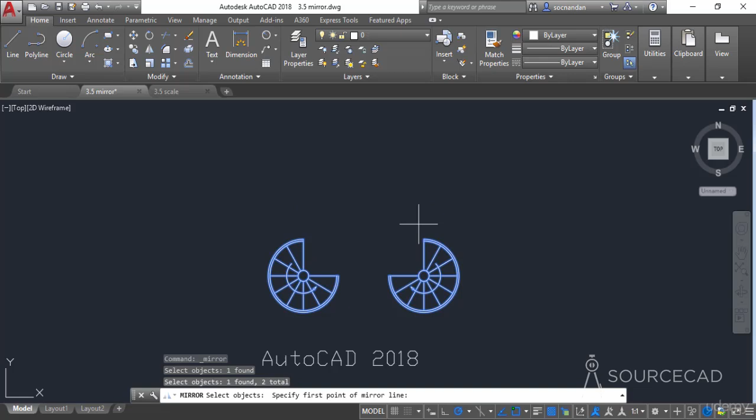Now let's say we want to make a mirror image of both of these objects on the upward side. For that, I'll once again select the mirror tool, select both of these objects, press enter, and specify this as the first mirroring point and this one as the second mirroring point, then simply press enter. Here we have it, the geometry as per our requirement.

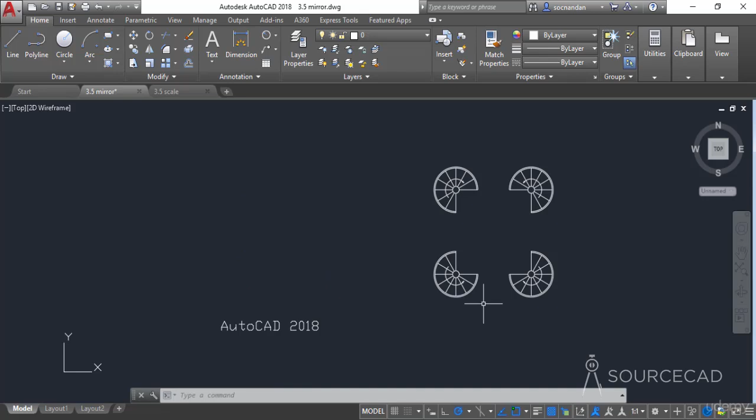Now in case you want to make a complete mirror image of all four geometries somewhere over here, you can again select the mirror tool, select the complete set of objects, press enter. Again you need to specify the mirroring line: select this as the first mirroring point and this point as the second. Now let's erase the source object in this case, so I'll click Yes, and the source object is deleted and a copy of that object is made here. Now let's press Ctrl+Z a couple of times to return back to the original geometry.

Now we'll try the mirror tool on this text also. Select the mirror tool, select the text, press enter. Click at a point, then click at the second point, and press enter. But in this case, you'll notice that the mirror copy has not been made. It is simply a copy of the original object, and these two objects are not laterally inverted as it was in case of the other object.

So in order to make a mirror image of text, you need to ensure that the mirror text system variable is set to 1. I'll make a copy of this object here, and now I'll apply the mirror tool once again on this text. But before that, I'll change the system variable. Let's type mirrtext and change its value to 1 and press enter.

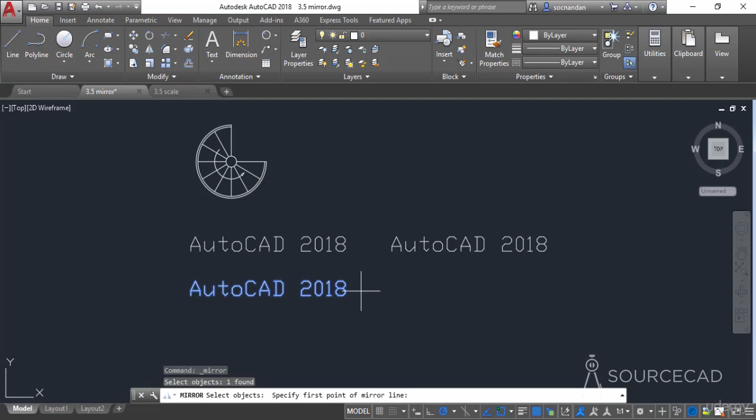Now select the mirror tool, select the text, press enter, specify the first point and the second point, and press enter. Now we have it as a mirror image, and you can compare it with the original copy, the mirror image which we made without using the mirror text system variable. In that case, the mirror text system variable was set to 0. In this case, it was set to 1.

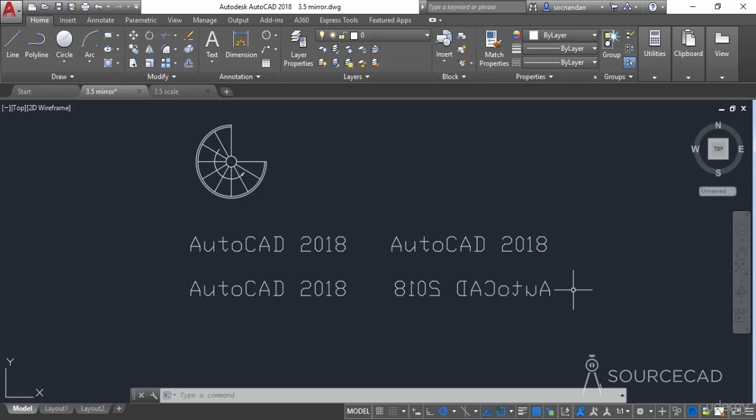So I'll once again type mirrtext and change its value back to the default 0. Now let's look at the scale tool. Here we have a simple geometry, and now let's assume that we want to increase the size of this geometry.

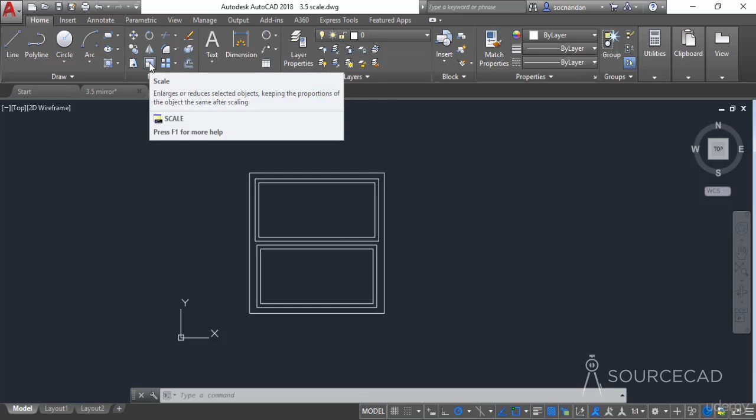So in order to increase the size, you can use the scale tool. Simply select the scale tool here on the modify panel, select the object, press enter, and now look at the command line. It now prompts you to specify the base point.

The base point will be the point which remains fixed when the object is elongated or contracted. So when the size of this object changes, the base point will remain fixed. I'll select this lower left corner as the base point, and now you'll notice that the size of the object changes along with our cursor.

So you can either dynamically apply the size using the cursor, or you can also enter a scale factor. In order to increase the size, simply add a value which is greater than 1.

If you add a value of 1.5, the size will increase to 1.5 times the original value. If you type a scale factor of 2, it will make a geometry twice the size of the original object. If you type 3, it will make a geometry thrice the size, and so on. Similarly, if you type 0.5 as a scale factor, it will decrease the size to half of its original value, and so on. So I'll type 1.2 in this case and press enter.

And here we have it. The larger geometry has been made. So now let's press Ctrl Z to get back to the original geometry.

Now, in case you want to make a copy of this object after scaling, you need to select that corresponding option. So I'll select the scale tool again, select the object, press enter, specify the base point, and now here we have an option of copy. Let's select this copy option, and now let's reduce its size to half of its original value. I'll type 0.5, press enter, and now you'll notice that we have a copied image.

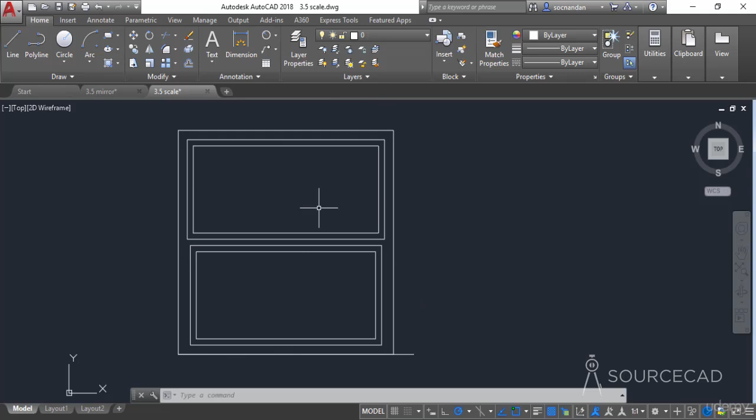So now you can see that there is a slight gap between this endpoint and this line. Let's assume we want to scale this drawing so that the base length becomes 1000 units and all the remaining length stretches in the similar proportion. For that, we can use the scale reference option.

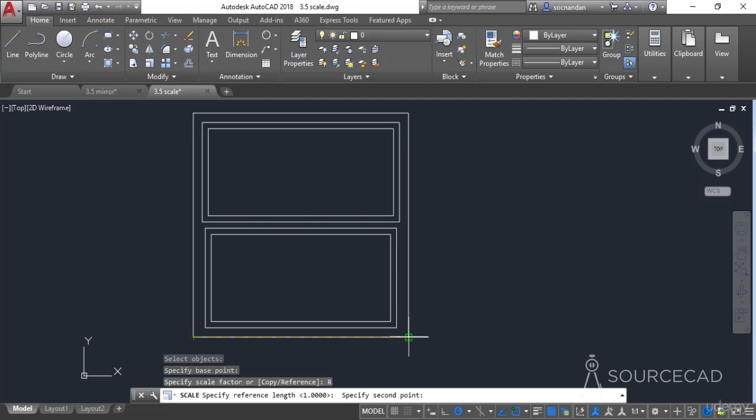So once again, go to the scale tool, select the object, and press enter. Now specify the base point, which we have specified in the previous case also, and from the command line select this reference option. Now we need to specify the reference length, which is the length of this line from this point to this point. I'll simply click at this point, and now I'll click at this point. So that's the reference length.

Now you need to specify the new length, and the new length is 1000 units. Simply stretch it and click at the end of this 1000 unit length line. So click here, and here we have it. Now the base length is equal to 1000 units and the remaining lengths are proportionally changed.

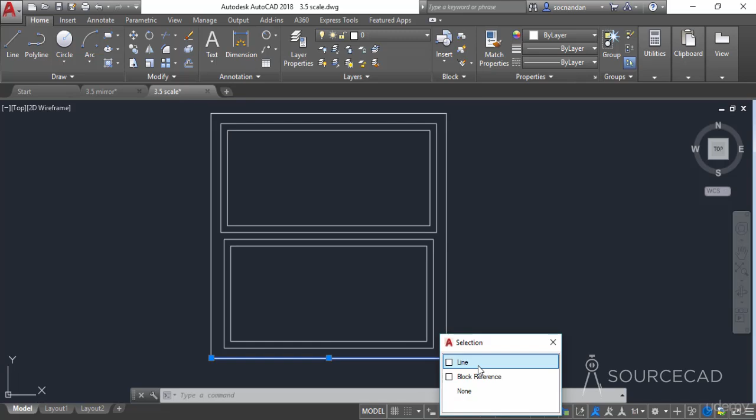So you can now erase that original line, it's no longer required. So in this way, you can use the mirror and scale command in AutoCAD.